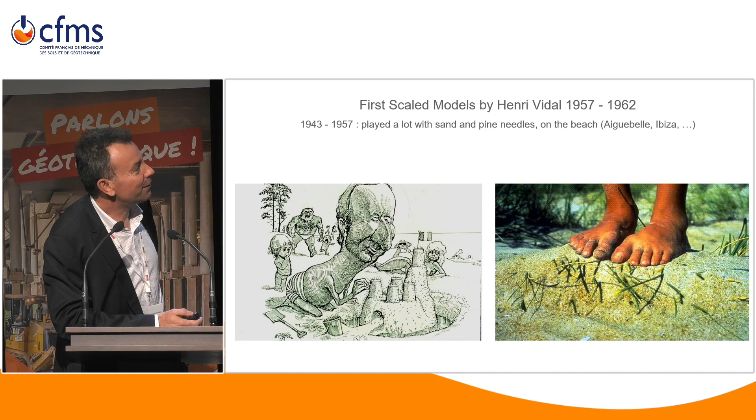This story starts on the beach. In the late 50s, early 60s, a young, yet-to-be engineer, Henri Vidal, was fascinated by the result he would get by mixing sand and pine needles, and was doing it again and again, sometimes with maybe some issues with other users of the beach. But somewhere at the limit between the sun and shadow, he had this vision, this intuition that mixing a granular material with reinforcement could lead to a new construction material. So after the beach, he went back to work.

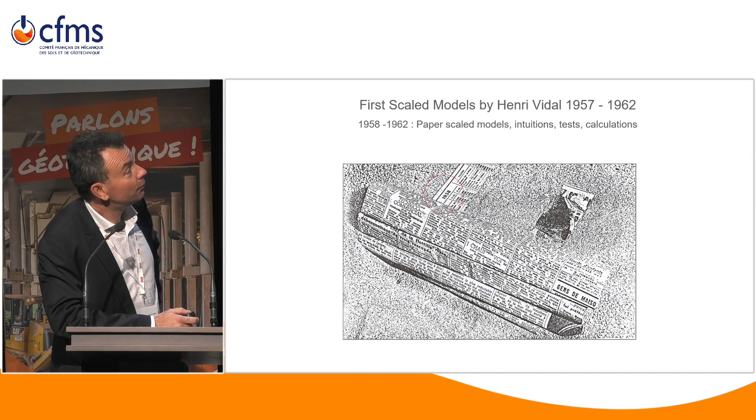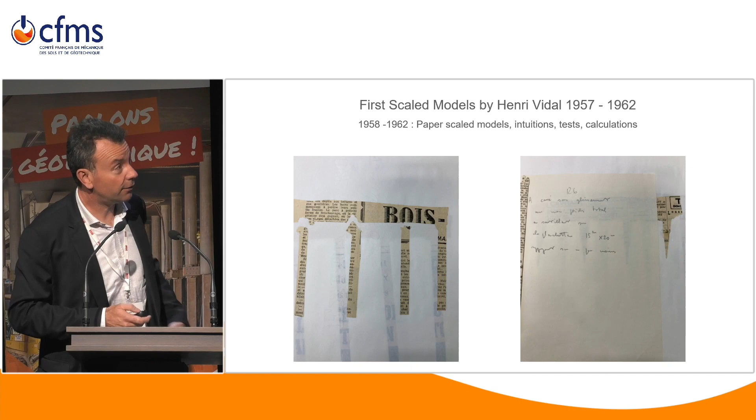He started his career as an engineer, and he also spent a lot of his time in the late 50s, early 60s, spending his evenings and weekends playing, now not with pine needles, but with newspapers. I have found in our archives—by moving the archives from one place to the other, sometimes you find little treasures—and last year I found a box, and inside the box I found these pieces of newspapers that are consciously archived on paper with some hand notes.

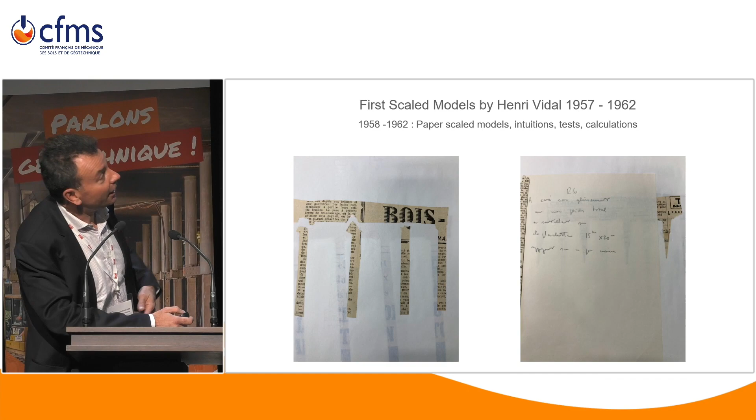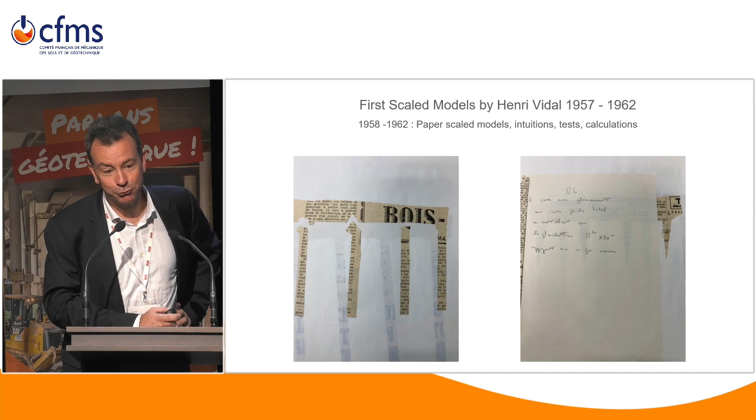This is an example of the first failure of a reinforced earth wall at the facing due to an excess of tension at the face. In French: 'à casser sans glissement sous mon poids total en sautillant sur la planchette de 15 cm x 20 cm.' So in English, I was jumping on a little wooden plank on top of this reinforced structure, and it broke at the facing, and this is the result.

Well, this is a fantastic story. I think it is this intuition and this passion about this will to make something concrete out of a vision, and it led, after all these developments, to this year, which is the 60th anniversary.

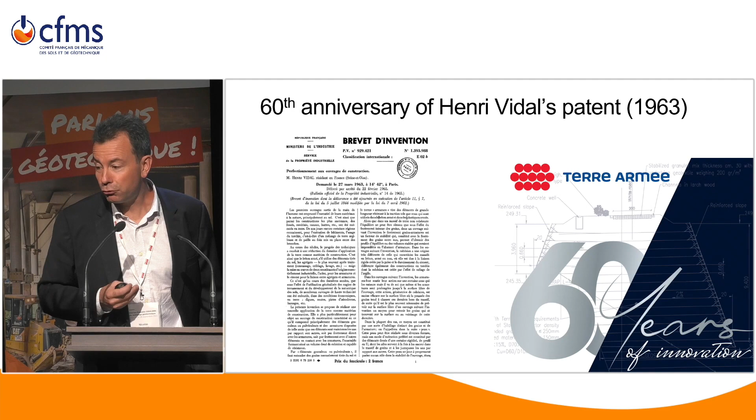It's the 250th anniversary that we are celebrating with the publication of Coulomb. It's also the 60th anniversary of two publications by Henri Vidal this year, and the filing of the initial patent, where he says—I'm not going to read it all—'I invented a new material which, on the contrary of concrete, does not need any glue to provide cohesion to granular material. And with that, we are going to do fantastic things for many different cases, especially in the infrastructure domain.' That's the introduction, not the claims.

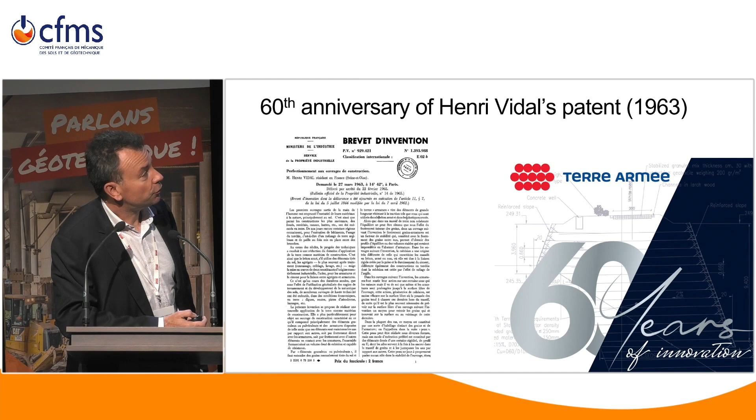At the same time, he also published—these are extracts from the patent, sorry for the formatting. He said it's a construction material with an artificial anisotropic cohesion provided by tensile reinforcement interacting with the soil by friction. Coulomb is not far. You see these little wedges on figure 1. That's the fundamental thing to understand: the beginning is the vision of a new construction material.

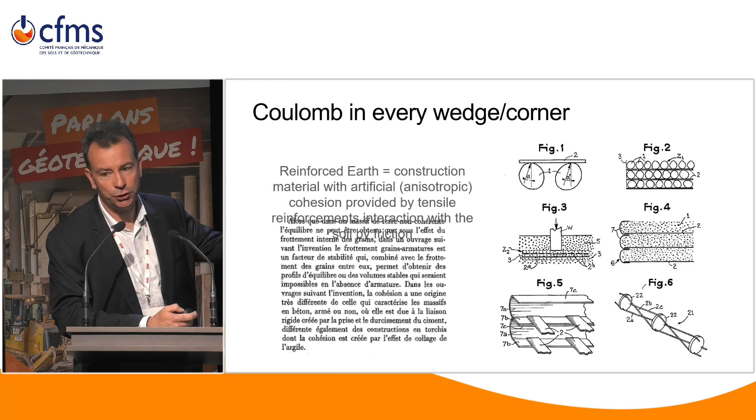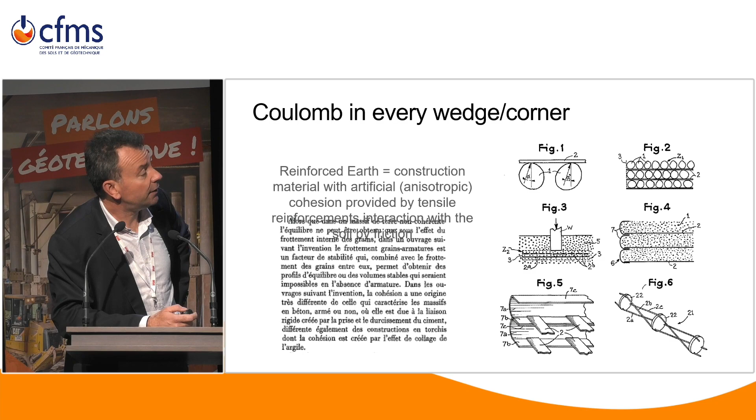After that comes the technological development, industrialization, the establishment of the company as a venture in 1968, and then an international success story, with now subsidiaries in most countries around the world, and activities typically in maybe 50 to 60 different countries every year where reinforced earth walls are built under our brand. And of course, there are also competitors and emulation.

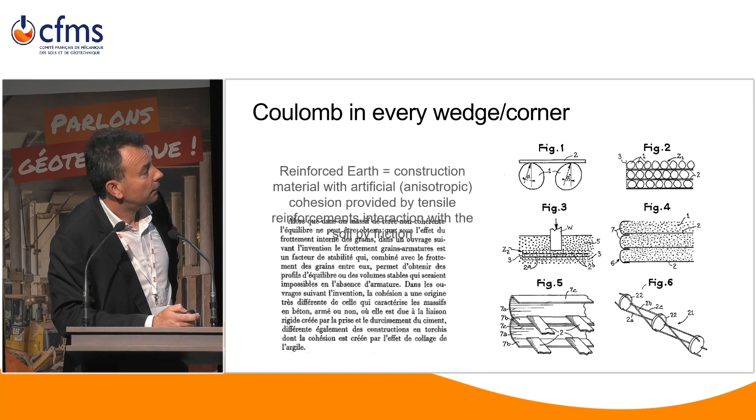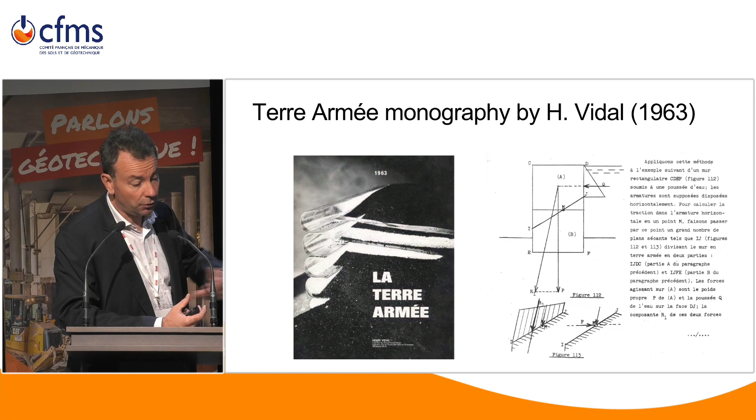In 1963, there's also the publication of a thick monograph with nice illustrations, where Vidal explains his theoretical understanding of his material, and also many different technological applications. For example, he writes that the reinforcement can be made of steel or can be made of textile. In 1963—some people think the invention of geosynthetics is in the 70s, but it's already in his vision at this early stage.

He is also explaining the stability of the structure—in this case it's water pressure, but it could be earth pressure. You see an earth pressure diagram or water pressure diagram, and a failure line, and he's deriving the contribution of the reinforcement to the stability of the soil mass.

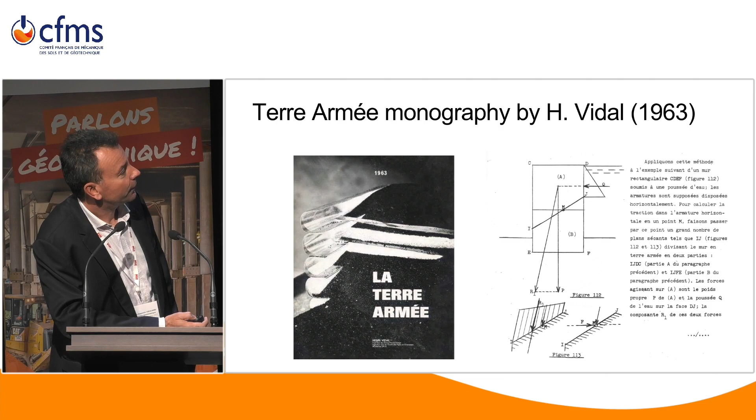This is not a theoretical presentation, but just from the first concept of limit equilibrium justification of the stability of this composite material, there were lots of instrumented structures to understand better how it works.

Laboratory tests, but also full-scale instrumented structures, and later on, also numerical models. You have to recognize that while the limit equilibrium method is a way to justify with some level of safety, like we heard this morning from the upper boundary approach, we can approach the safety level of ULS.

We also need to take into account the construction history and the way the stress field and the tension in the reinforcement is generated when you build these structures from bottom to top. Instrumenting these structures has been very key to this understanding and led to some discoveries.

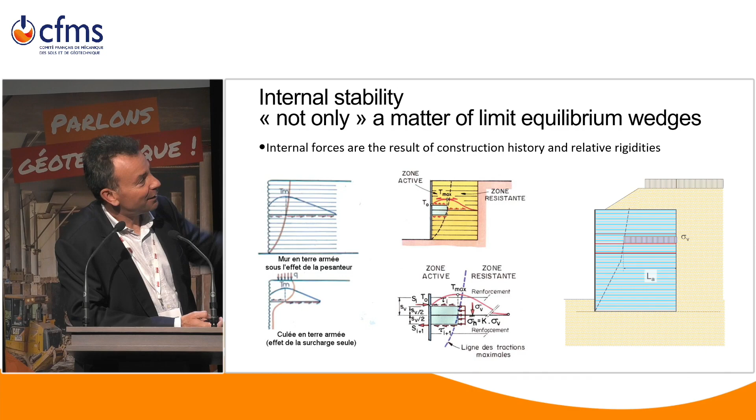I'm not going to go too much into detail, but typically this is what I call the Schlosser method, which is fundamental and still used in many codes around the world. It's a local equilibrium method, which balances the local horizontal earth pressure at the location of this maximum tension line with the long-term breaking capacity, resistance of the reinforcement, and the pull-out capacity at the back of the line. The pull-out capacity is, thanks to Newton and Coulomb, a matter of weight of soil on top and of interaction coefficient.

The next very important increment in the technology has really been the development of this steel reinforcement with ribs. Before that, they were smooth, and they needed to be wide to resist the pull-out.

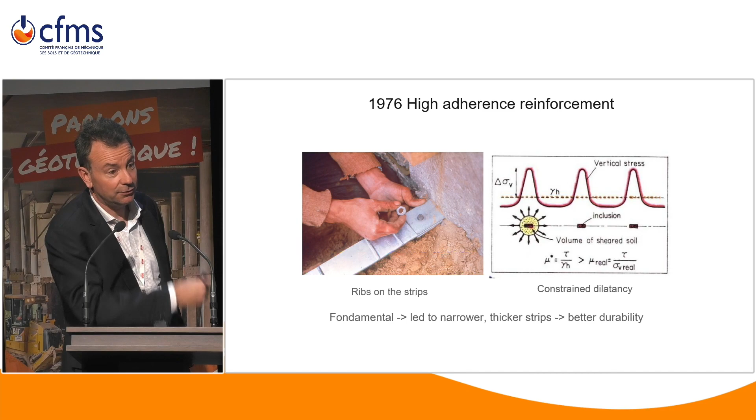With these ribs, you have on the right-hand side, a sketch. You imagine you are facing these reinforcement strips, you pull them out, and you generate in a well-compacted and non-uniform granular material some dilatancy, which turns into arching effect and concentration of vertical stress on both sides, on both faces of the strips. So you have an apparent friction coefficient, or pull-out capacity, which is much higher than the friction angle of the soil.

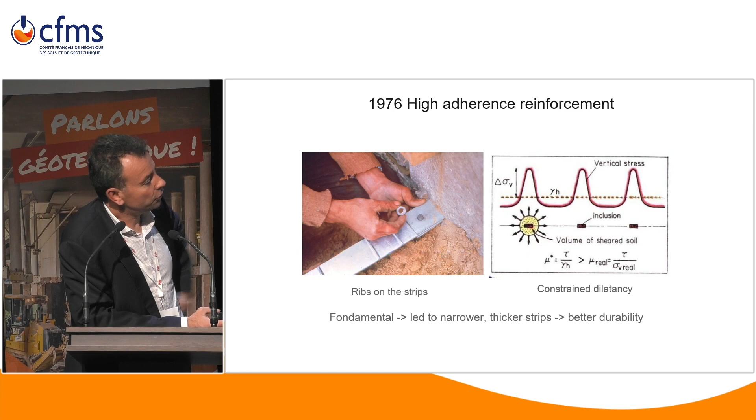This has allowed to stay economical while making narrower reinforcement but thicker for longer durability in the long run.

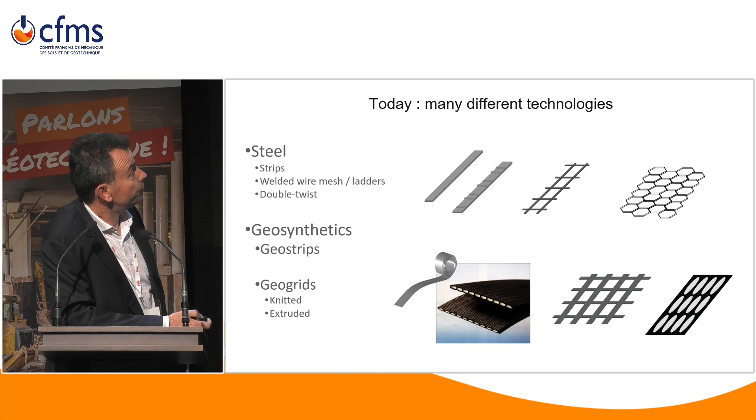Today, there are many different technologies used by the different actors on the market: steel strips, steel ladders, double twisted wire mesh, which can be galvanized, can be sometimes also covered with some polymers, and also, of course, geosynthetic reinforcement in the shape of flexible strips. Geostrips is the name, or geogrids, with different ways of manufacturing those.

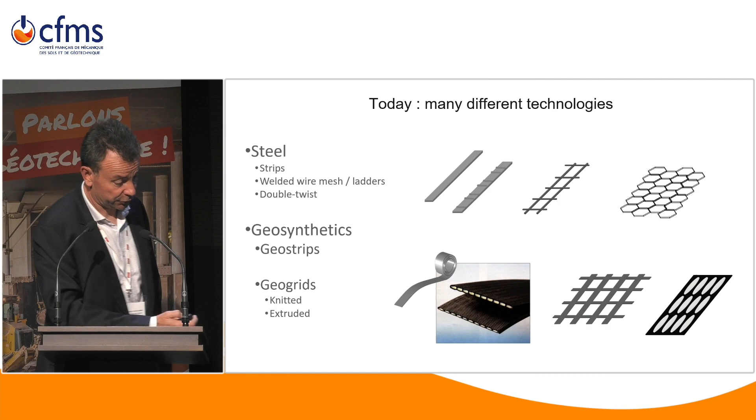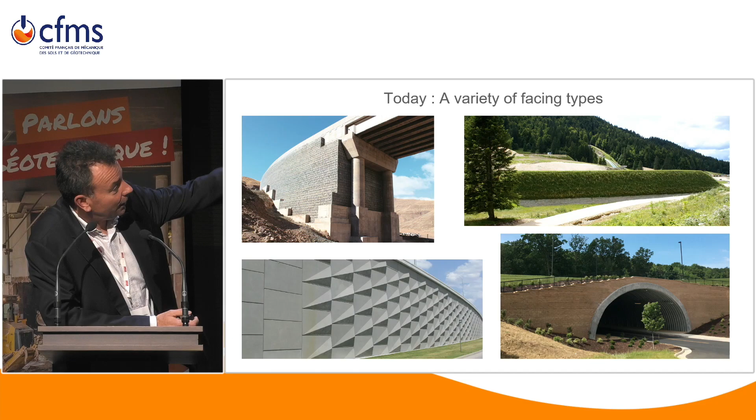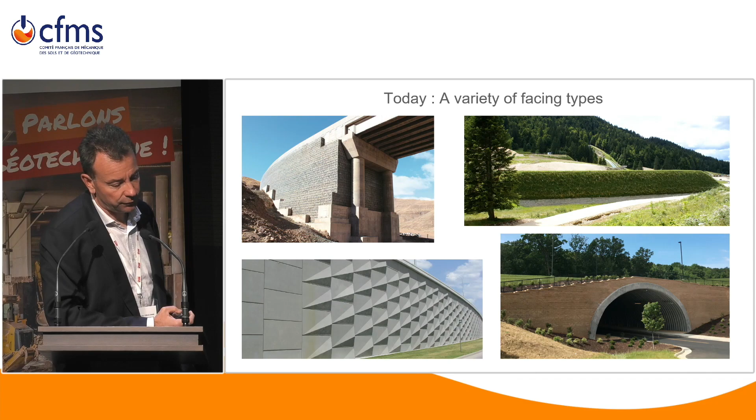They are typically associated with a variety of facings. You have wire mesh with stone backing on the top left, steep slopes with vegetation on the top right, a variation on the famous concrete panel on the bottom left, and modular block walls on the bottom right. This is where there are differences in the systems, in the way the connection is made between the reinforcement and the type of facing, and this is a very important point, while not really linked with Coulomb this time.

In terms of application, what is fantastic in the story of reinforced earth is that many of the applications have been developed in the early stage because this was something new. There was a lot of excitement and a lot of trial, and maybe it's a period where there was more self-confidence on the side of the owners to try new things and to push for innovation, which is probably more difficult now when the responsibilities are more spread around.

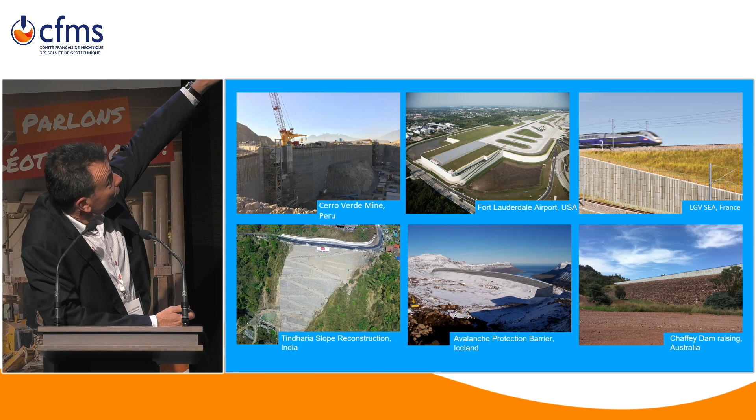But anyway, among this is just a few examples of the main applications of reinforced fill structures: a nearly 30-meter high wall for access to a primary crusher in a mine in Peru, in a very highly seismic area.

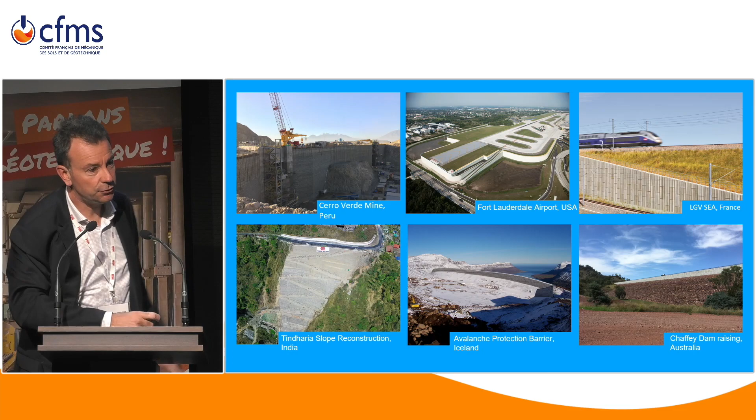On the top center, this is very interesting. In fact, we are on very soft soils, and this is an extension of an airport. The airport is typically developed on an elevated plateau, but if you want to extend it, you cannot have the aircraft going down, it needs to be leveled. So they needed to backfill a wide area, but it's on soft soil, so they needed to put some rigid inclusions for soil improvement, and that led to the choice to use large quantities of retaining walls in order to optimize the cost of the overall scheme, because they did not need to make soil improvement below the slope.

On the right-hand side at the top, we are very proud of that. We have delivered a few structures under the high-speed line between Tours and Bordeaux, with commercial speeds of 320 kilometers and test speed 352. We went through a very demanding approval process, and the structure has been monitored with dynamic sensors to look at the effect of trains passing. There is very good behavior. These structures are ductile, and there is no stress concentration because the facing is also very articulated.

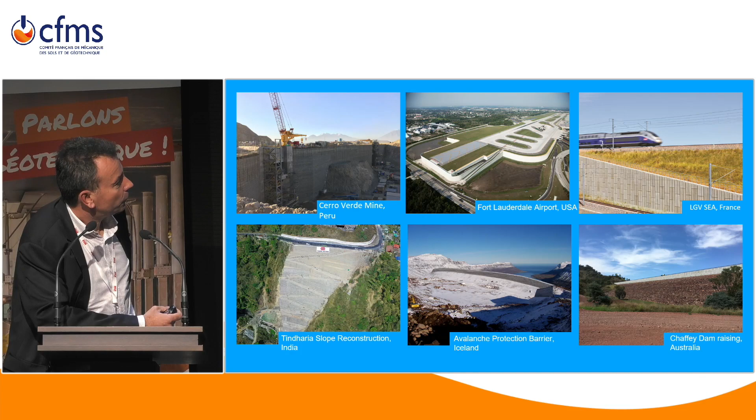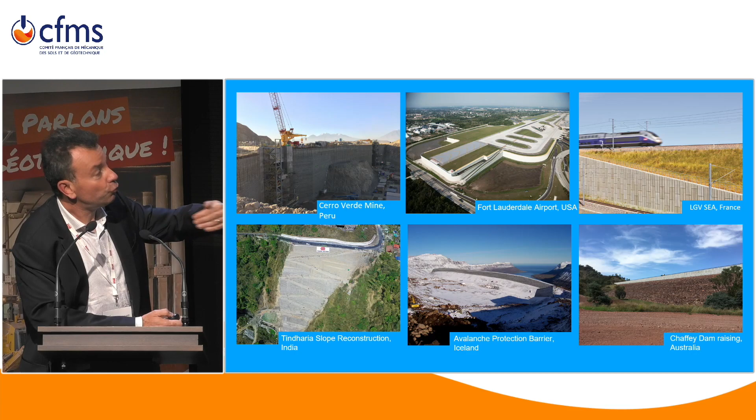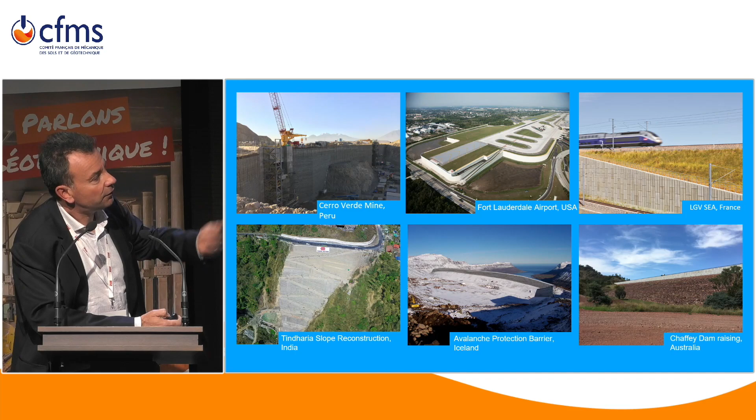Avalanche protection barrier - we do quite a bit in Iceland in particular. Very impressive structures. And more - let's say not less impressive, but quite interesting - a little application: back-to-back wall on the crest of earth dams, to increase the capacity, or at least to guide the water in terms of overflow to spillway. Sometimes these dams have been made without a proper spillway, and this reduces the risk in case of flood. It's not a structure which is constantly under water pressure - it could be with proper waterproofing, but it's just to guide the water to the spillway.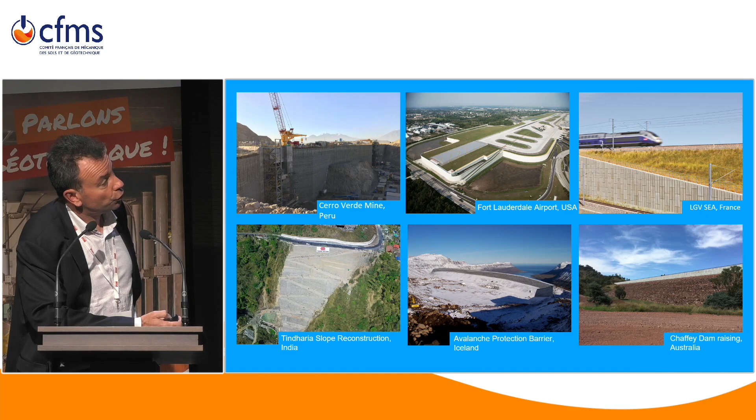I was talking about the capacity of these reinforced earth structures to cope with vibrations, and let's talk about high seismic impact. Terre Armée Reinforced Earth has been an incredible success in Japan. We have some licenses there, and we are going to celebrate next year the 50th anniversary of the licenses.

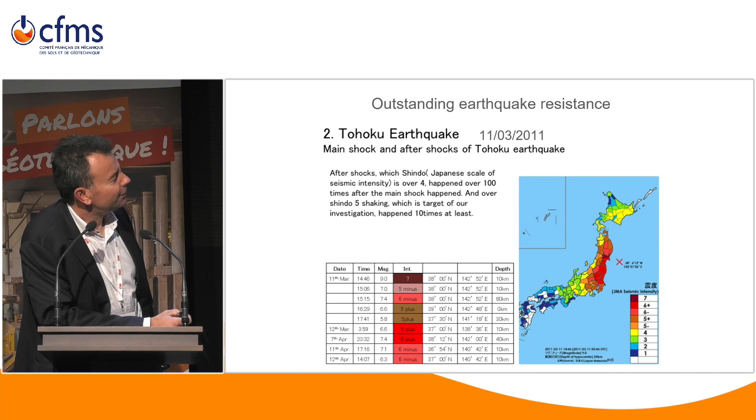And they have built, I would say, tens of thousands of structures over the years, sometimes very small, sometimes larger. And they are very rigorous in investigating the structures after a major seismic event. After the very large Tohoku earthquake in 2011, which was followed by a significant tsunami, they investigated the Terre Armée structures around. They have a ranking system from structures that show absolutely no visible damage - visible, I say, because it's visual inspection - to structures that have collapsed completely.

So it's rank 6 in red. They have this ranking system with different levels of damage, and it is amazing to see that rank 1 and 2 structures, that may show sometimes a little bit of deformation but need no intervention, account for 98% of the structures they investigated. They investigated more than 1,400 walls - it's significant work.

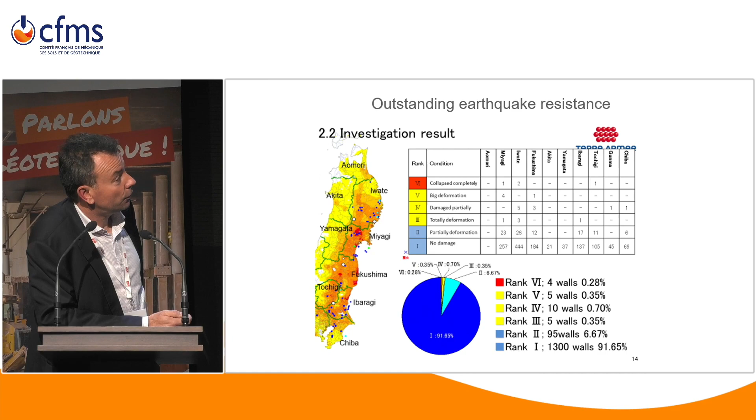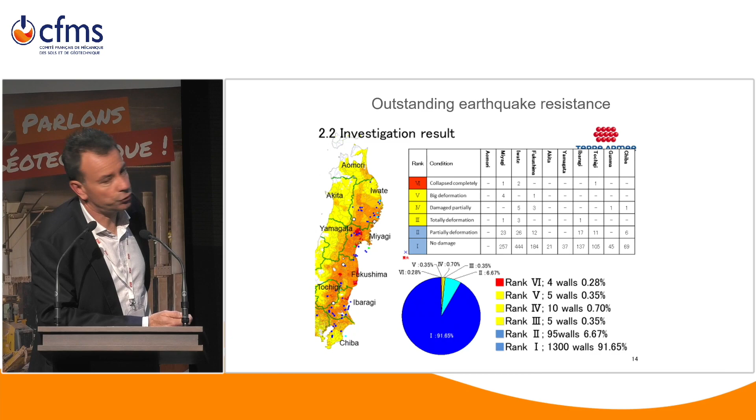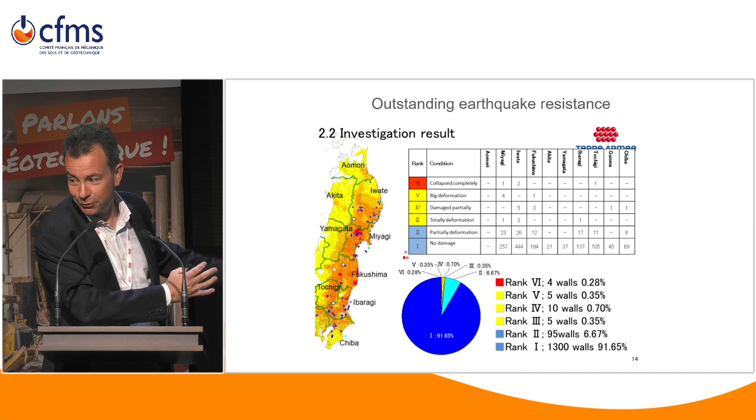And only 4 structures were completely destroyed. If I remember well, a couple of them were washed away by the tsunami. One I don't remember, and another one was moved by 7 meters due to liquefaction of the foundation soil. It moved as a monolith.

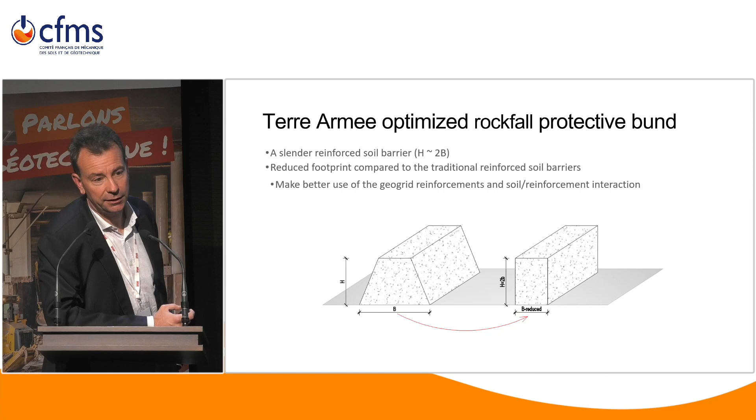Another application we have investigated recently is how we could provide an efficient, optimized protective bund for rockfall. Earth bunds are the solution for high energy impact when nets and barriers made of netted steel are not efficient. But there is an issue of right of way, of land usage using gentle slopes. So it's known to use steep slopes, like on the left-hand side. But so far there have been very, very few examples of vertical structures built back to back to reduce the footprint. While it has some advantages - you reduce the footprint - but you also put more mass at the top.

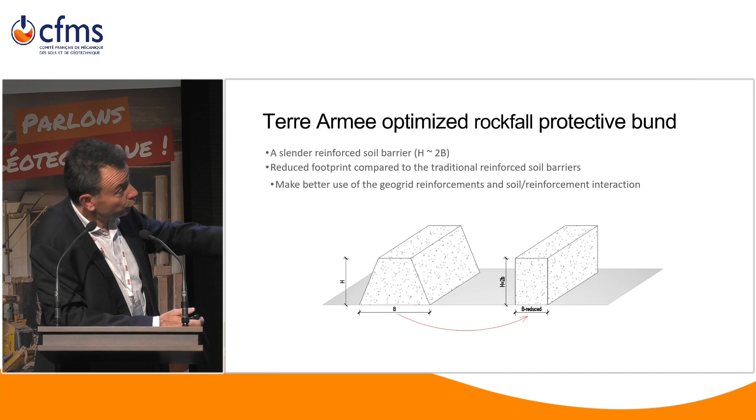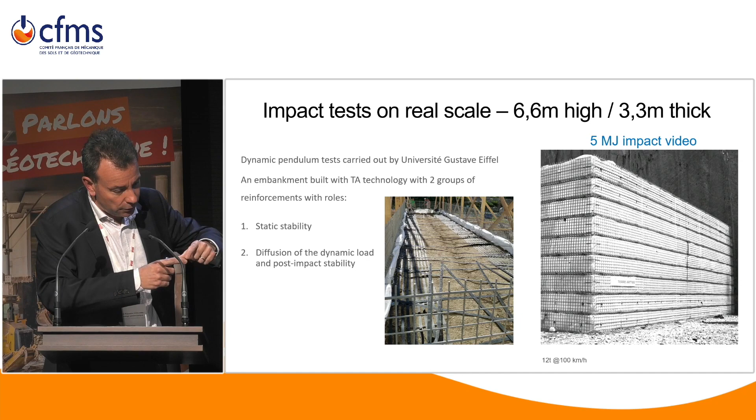We have done about 10 years of collaboration with Université Gustave Eiffel. Through different steps, we have developed one solution which consists in making a regular back-to-back structure - you see these geostrips that connect the two faces like a shoelace, if you want. And we have added some lateral geogrids, high strength, to connect the structure laterally.

And if it works - yeah, that's the slow motion of the full-scale test. The structure is 6.6 meters high, 3.3 meters wide. The impact is 5 megajoules, which is indeed 12 tons at 100 kilometers an hour. The block was arrested. The structure deformed significantly, but the block was arrested, and the structure did not fail - it was stabilized by this additional reinforcement, which particularly on the opposite side helped to keep the structure in one piece.

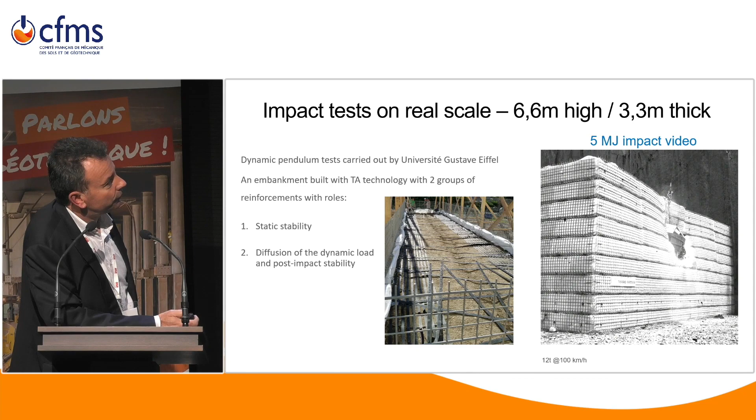So we are very proud of that, and we think it should be more considered for rockfall protection. We see all the events in the Alps, etc. With the rising of the stress level, there is clearly a need for protecting our assets. That's all for now. Thank you very much for your attention.